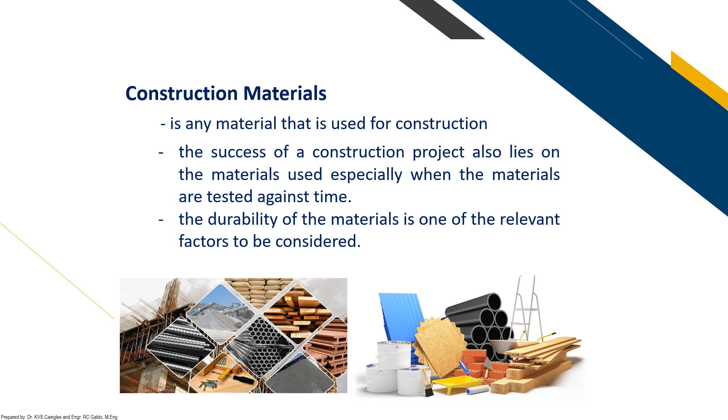There are two classifications of construction materials: those that are manufactured and those considered naturally occurring materials. Manufactured products include cement, rebars, pipes, tiles, ceramics, glass, paints, and so on. Naturally occurring materials include stones, timber, sand, rock, soil, and the like.

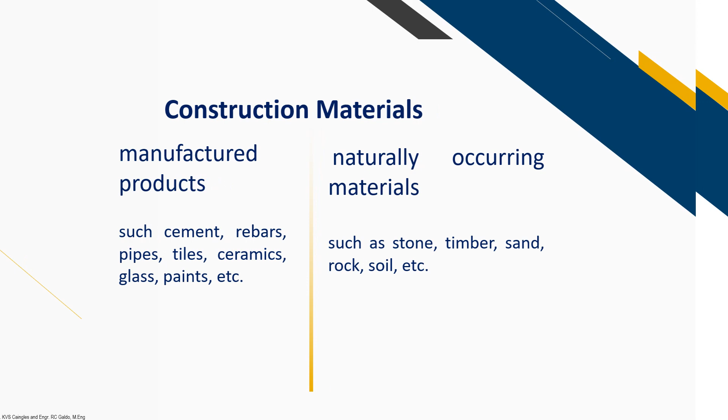Materials testing is performed for a variety of reasons and can provide a wealth of information about the tested materials, prototypes, or product samples. The data collected during testing and the final test results can be very useful to engineers, designers, production managers, and others. Results from tests conducted on various construction materials can go a long way, from the design phase up to the implementation or construction phase of a project.

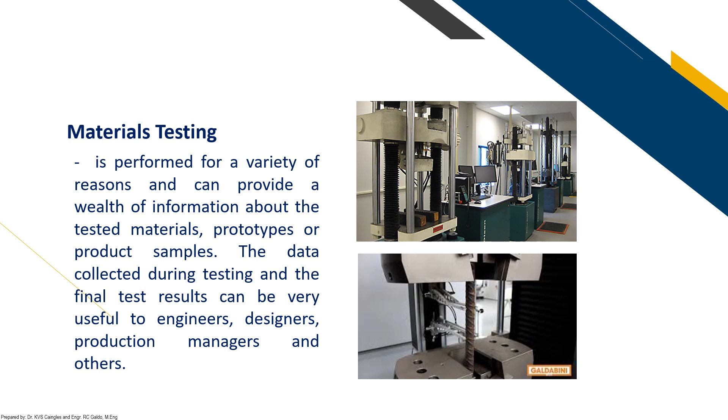So why do we need to conduct material testing? Here are some reasons why it is very important to conduct material testing or quality tests on materials being incorporated into the work. First, we need to meet the requirements of regulatory agencies.

One example of this is for projects implemented by the government through its engineering arm, the Department of Public Works and Highways, or DPWH. DPWH has standards when it comes to materials and also items of work being done, constructed, or implemented in the project specifically.

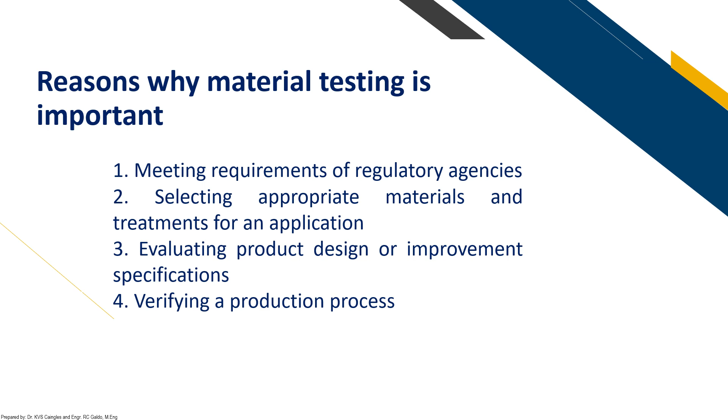Third reason is that we evaluate the product design or improvement specification. Fourth is verifying a production process.

Now we talk about the different factors determining the choice of proper material for a structure. These are the factors that we need to test, as we choose an appropriate material to be incorporated into the work.

These serve as guides or parameters on what to evaluate through material testing. The first factor is the strength, rigidity, and durability requirements, because a certain material has requirements in terms of strength, rigidity, and durability.

When we say strength, rigidity, and durability requirements, this relates to permanent loading, which corresponds to creep strength. Creep strength is defined as the maximum stress endured by a material for a specific period of time without extreme deformation. Permanent loading is one method in materials testing, with specific tests that mimic permanent loading, allowing you to evaluate the creep strength of your material.

The next factor is fatigue strength. To determine this, you need to subject your material to repeated loading, using standard tests that mimic repeated loading to verify the fatigue strength of a material.

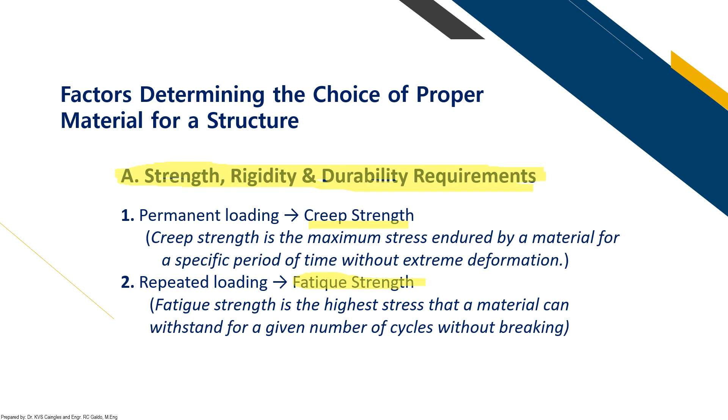So, next is the toughness and resilience of a material. How do we evaluate that? We do impact loading. There are standard tests that do impact loading to a material for us to determine and evaluate the toughness and resilience of a certain material. Toughness is defined as the property due to which the material can withstand impact loading without fracture. Resilience is defined as the property due to which a material can store energy without having permanent deformation. This is still under the strength, rigidity, and durability requirements.

Now, next factor is the hardness and resistance to abrasion. How do we evaluate that factor or parameter in the material? We do surface loading. There are standard tests that do surface loading to a certain material.

From surface loading, we can determine and evaluate the hardness or resistance to abrasion of a certain material. Hardness is measured by poking a point into the test material and measuring the depth of penetration. Abrasion resistance is measured by rubbing something against the test material and measuring how much material is removed. This gives us a short idea of what surface loading is all about, and what type of process it is, so that we can determine and evaluate the hardness and resistance to abrasion of a certain material.

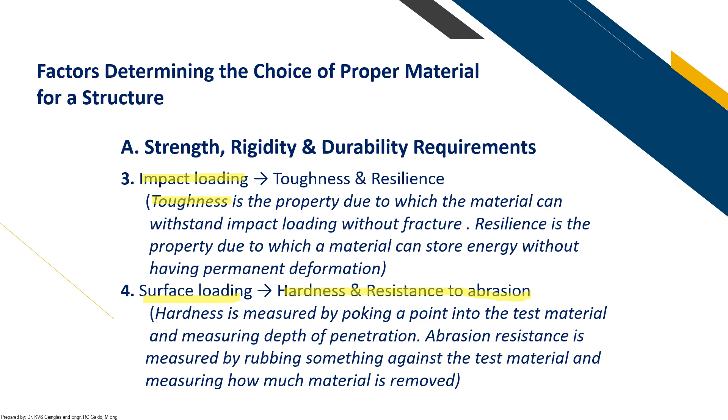Aside from the factors of durability, rigidity, and strength requirements, one other factor that determines our choice of proper material for incorporation into the work is the environmental requirements.

Under environmental requirements, we have the coefficient of thermal conductivity. The thermal conductivity of a material is a measure of its ability to conduct heat. For us to determine this coefficient of thermal conductivity, we need to subject the material to temperature changes. There are standard tests that do temperature changes on a certain material.

Next factor, still under environmental requirements, is permeability. Permeability is defined as the volume of a fluid of unit viscosity passing through a unit cross-section of the medium in unit time under the action of a unit pressure gradient.

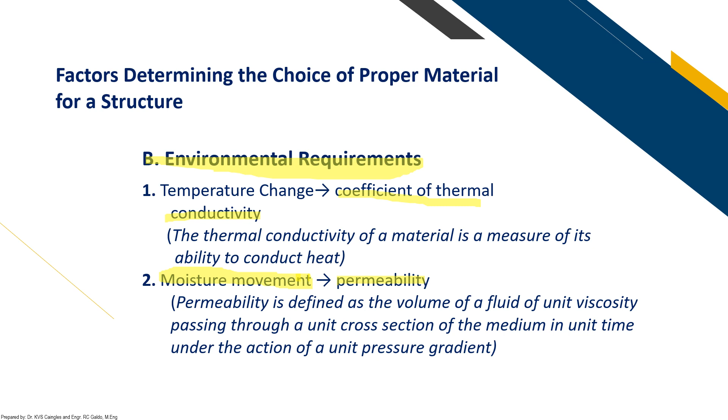For us to determine the permeability factor or permeability behavior of our material that we will use in the work, we do moisture movement. We manipulate the moisture of a certain material. There are standard tests that manipulate the moisture in the material in order for us to evaluate its permeability behavior.

Next factor under environmental requirement is, of course, the chemical composition of your material. It includes chemical reaction, which is a process in which one or more substances, the reactants, are converted into one or more different substances or products. For us to determine and evaluate the chemical composition of a certain material, we need to conduct tests to verify the chemical effects of the material. From those chemical effects, we will be able to evaluate and determine the composition of a certain material.

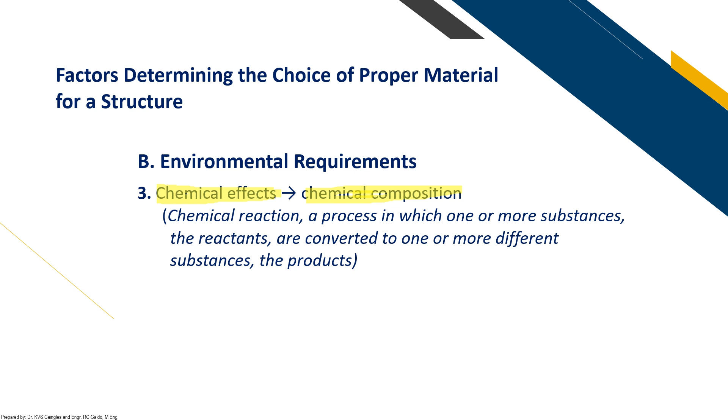Aside from environmental requirements and also the strength, durability, and rigidity requirements, one other factor in determining our choice of proper material to be incorporated into the work is the economy.

We choose materials as per the design, and we don't only choose materials based on design, but also we choose materials that are at a reasonable price that suits our budget as well.

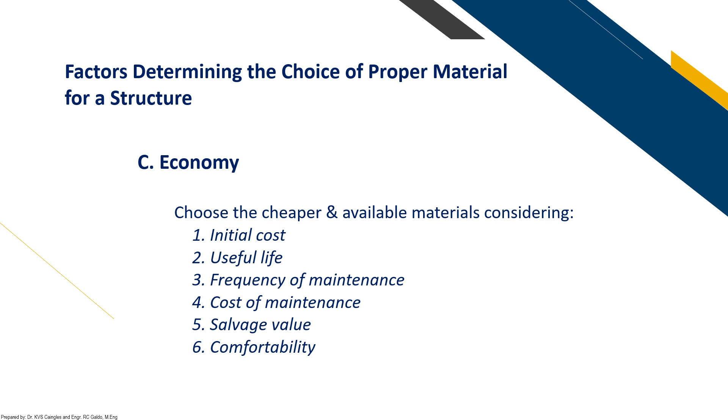There are a few things we consider in choosing cheaper and available materials for the work. First is the initial cost. Second is the useful life, and also the frequency of maintenance, meaning knowing how often this certain material requires maintenance and the cost it incurs. Also the salvage value, and lastly the comfortability.

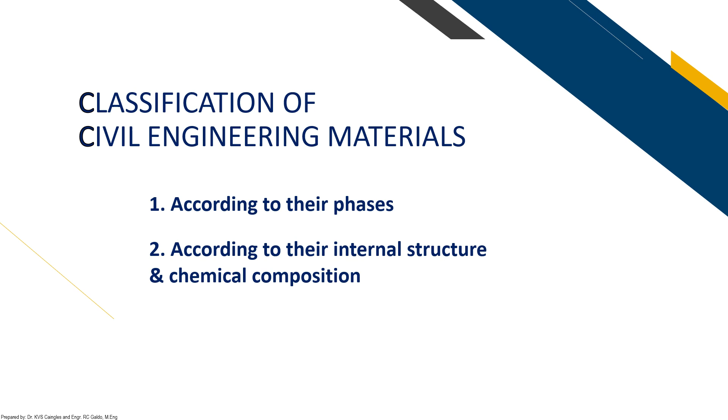There are two classifications of civil engineering materials. First, we classify those materials according to their phases, and then we also classify civil engineering materials according to their internal structure and chemical composition. First, we talk about the classification according to their phases.

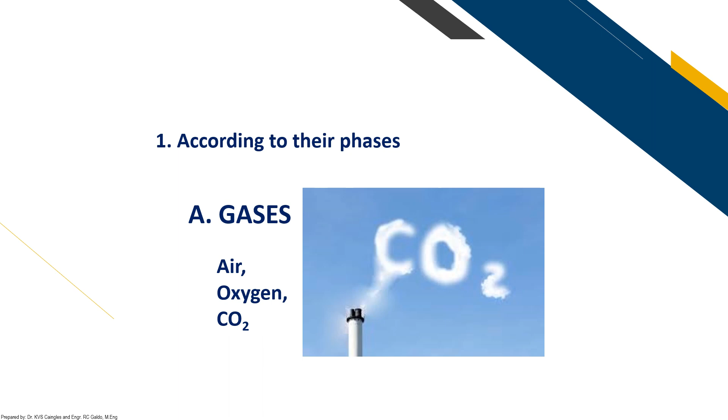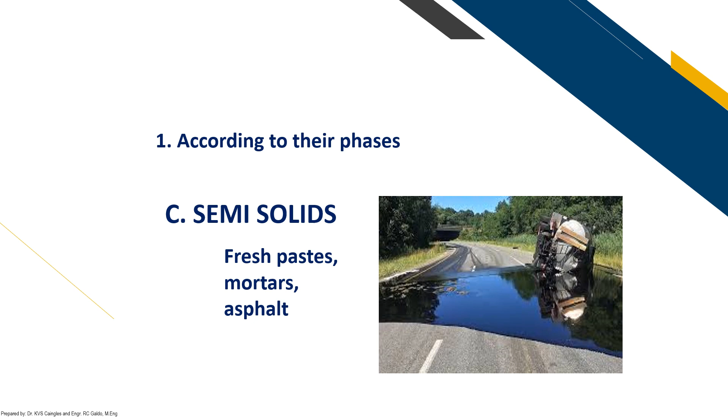First, we have the gases, which include air, oxygen, and CO2. We also have liquids, which are water and chemical admixtures. We also have the semi-solids, which include fresh pastes, mortars, and asphalt. Those are what we consider semi-solids. And we also have metals, which includes all types of metals.

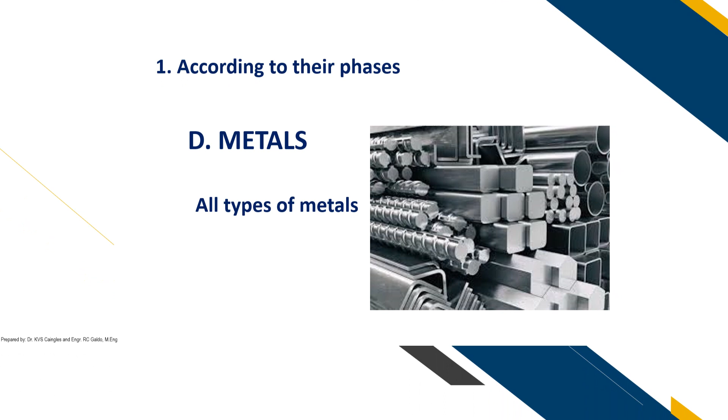There are two types of metals: the ferrous and the non-ferrous. For ferrous, we have iron, cast iron, and steel. For non-ferrous, we have aluminum, copper, zinc, and lead, and all others.

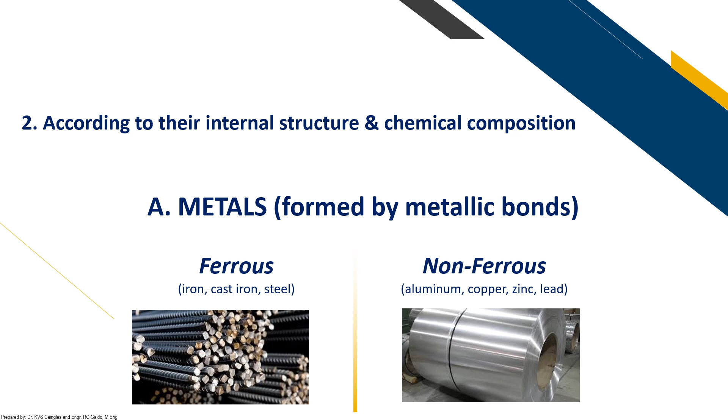So the next classification is also according to their internal structure and chemical composition. Previously we discussed classification according to their phases. Now the second classification is according to their internal structure or chemical composition.

So first we have the polymers. Polymers are long chains having molecules of CHON, which are formed by covalent bonding. The chains are bound to each other either by covalent bonds or van der Waals forces.

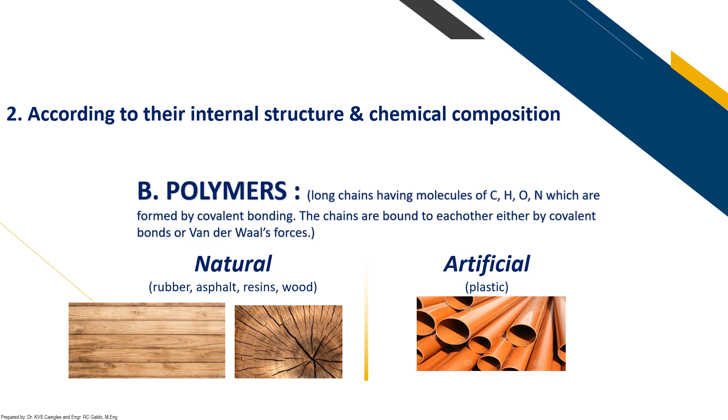For polymers, we have natural polymers and artificial polymers. Natural polymers include rubber, asphalt, resins, and woods. If we talk about artificial polymers, these are all kinds of plastic.

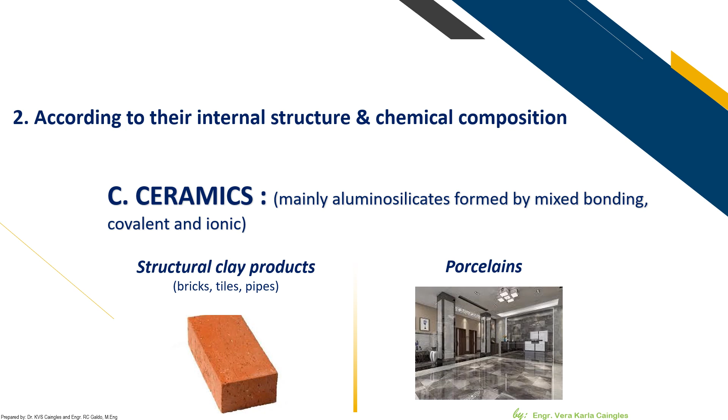Next are composite materials, which can be either natural or artificial. For natural composite materials, we have agglomerates. For artificial composite materials, we have Portland cement or concrete, which are considered artificial composite materials.

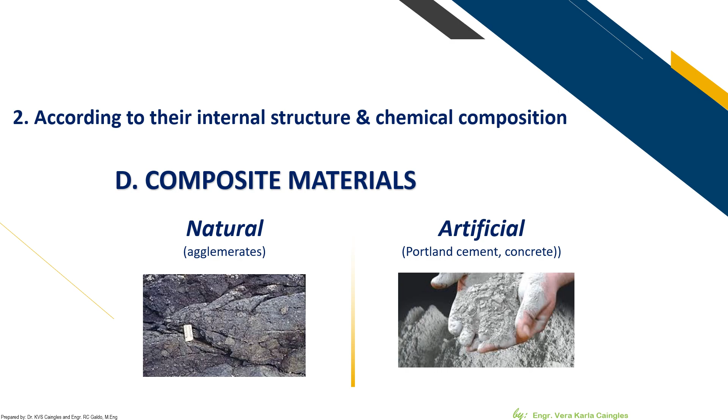Now next we also have reinforced composite materials. Under that we have reinforced concrete and also reinforced plastics.

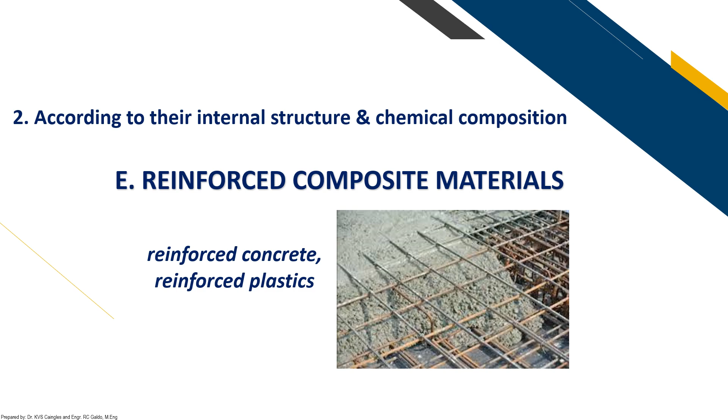So after having discussed the classification of materials, whether according to their phases or according to their chemical composition or material composition, we also discussed the factors that determine our choice of appropriate materials, namely the strength, durability and rigidity requirements, as well as the environmental requirements and the economical requirements.

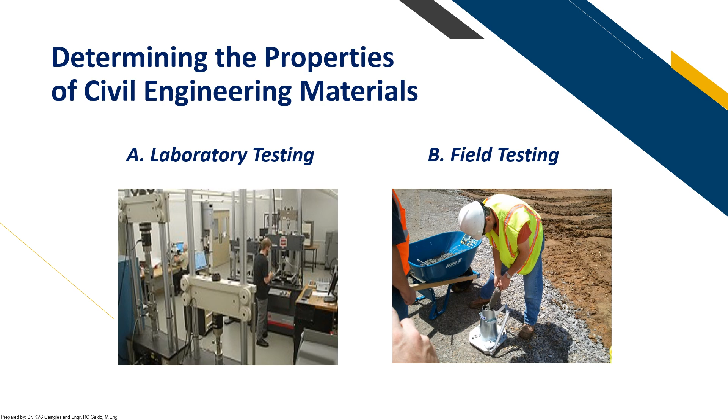So how do we determine those properties of civil engineering materials? There are two ways of determining properties of civil engineering materials: we have laboratory testing and field testing. So if we say testing, it could mean two things - either laboratory testing or field testing.

And as we do testing, both for laboratory and field testing, we follow standards from standardized institutes, following material requirements, equipment requirements, and the step-by-step procedure on how to properly conduct a certain laboratory test or field test.

And here are some of the list, there are five of them in total. This includes the ASTM, AASHTO, and ACI - the American Society for Testing and Materials, ASTM, the American Association of State Highways and Transportation Officials, or AASHTO, and the American Concrete Institute, or the ACI.

And for Turkey as a country, we have the Turkish Standards Institute, or the TSE, and we also have based in Europe the CEN or the European Committee for Standardization. And for Germany, they use the DIN, the Deutsche Institut Norm, and for England they use the BSI or the British Standards Institute.